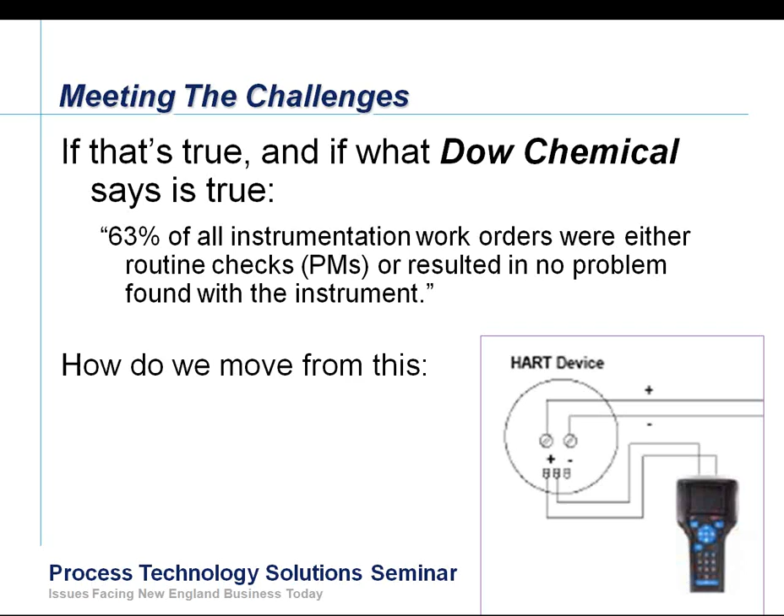But think about the time delay built into today's process. The operator sees a problem, generates a work order, and the work order goes into the queue. By the time the technician gets around to executing it—unless, of course, it's an emergency breakdown—there's still a time delay.

So what we want to do is move from that old model to this model, where somebody can click on an icon—one mouse click—and see this.

And what this is, is an attempt by Emerson to reduce increasingly complex technology—even 4-20 milliamp with HART devices—and this is actually a Fieldbus device, which gets even more interesting if you're doing Foundation Fieldbus, perceived to be very, very difficult, but it isn't.

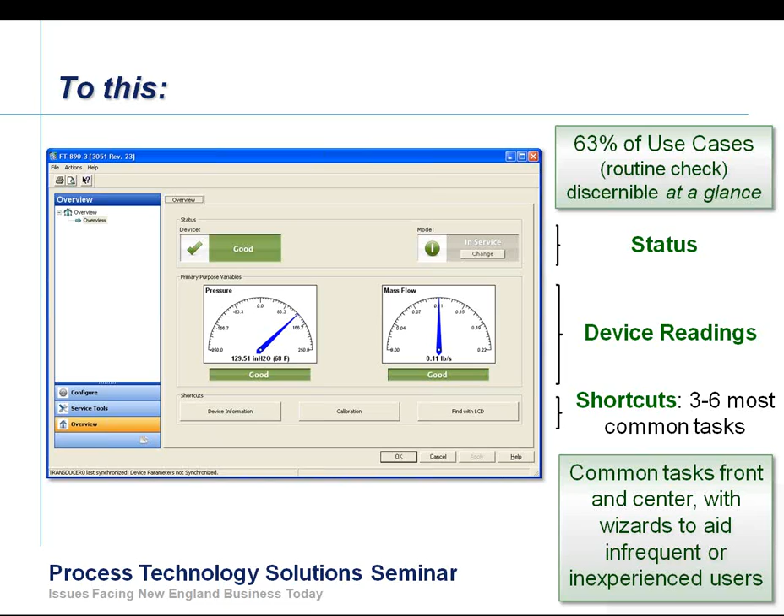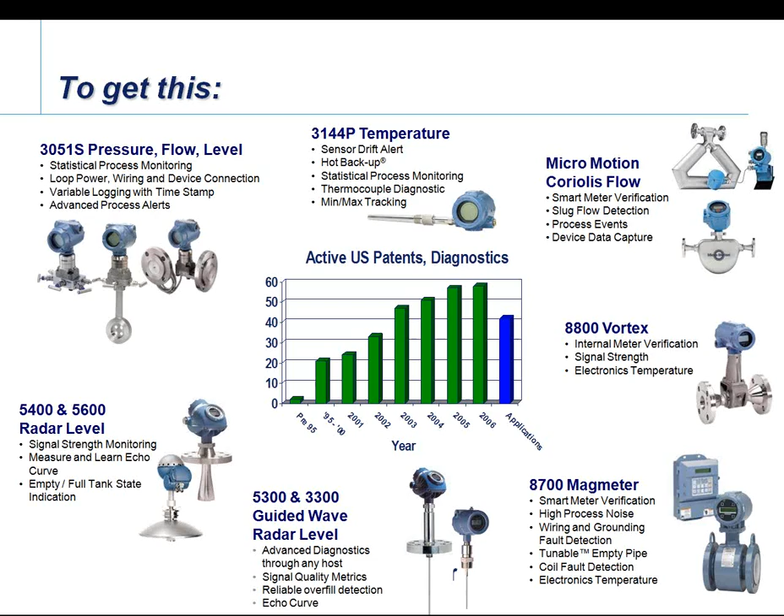That happened to be a pressure instrument. Can we do this only on pressure instruments? No, of course not. We can do this on virtually every field device that Emerson makes. This is actually not proprietary technology to Emerson. It's just that Emerson has taken more advantage of taking the intelligence that comes from a smart instrument of any protocol and presenting it in a user-friendly manner, especially to someone who may have just started at your business last week. They can get the same benefit out of working with our instruments that an old hand can get because of that interface, and it applies to all instruments.

Here is the basic philosophy. You can see my cursor circling the field device, and since the very beginning of intelligent instrumentation, and that would begin with Honeywell DE, DE standing for digitally enhanced, Honeywell was the first instrumentation automation vendor to actually put a microprocessor into a field instrument so you could query the instrument for its health. You used a handheld tool. So the model we showed with the brand new 475 field communicator a couple slides ago is not new technology, it's just that the tool is new. And in this particular case, the method is new as well. Back then, what we were checking for was the health of the field device, and today we're checking for the health of the field device.

That's the root of the model. What we are trying to say is that field devices have gotten so smart, and the advance of microprocessor technology has proceeded so far since the early 1980s when DE came out, that now the device is capable of monitoring not only its own health, but also the loop power, what the host is seeing, the connection, and actually some intelligence about the process. So what we want then, here is the fully developed model, is not just device health, but everything that instrument touches, from the process all the way back to the host, and we want to make it easy to use. That's where your payoff comes in.

So if we look at process intelligence and connection, what we're really trying to do is look for things that are happening in the process at that point. Is that process connection connected to the process, and is the line connecting it plugged? Are things in the process going awry? Do I have an unstable flame in a fired heater and I'm still continuing to feed fuel into it? What could be the ramifications of that? Can I operate a distillation column more efficiently by operating it closer to the point of flooding, which is the most efficient place to operate it? Process leakage - it could be the process connections themselves, or leakage themselves.

So once again, without going too much further into this, I want to be able to see more and more. The instruments have that ability, and everyone out there who has ever installed an instrument, from the very beginning of the process thinking about, gee, it would be better for the business if we had a measurement at this point, to the point where you actually flip the switch and you have the measurement, you know exactly what that costs - it will be higher, say, in life sciences, or maybe in a refinery application. It might not be so high in a facility that is not large in size and scale. But no matter what, the cost of installing a point becomes more easily justified and better amortized if you get more information out of that point.

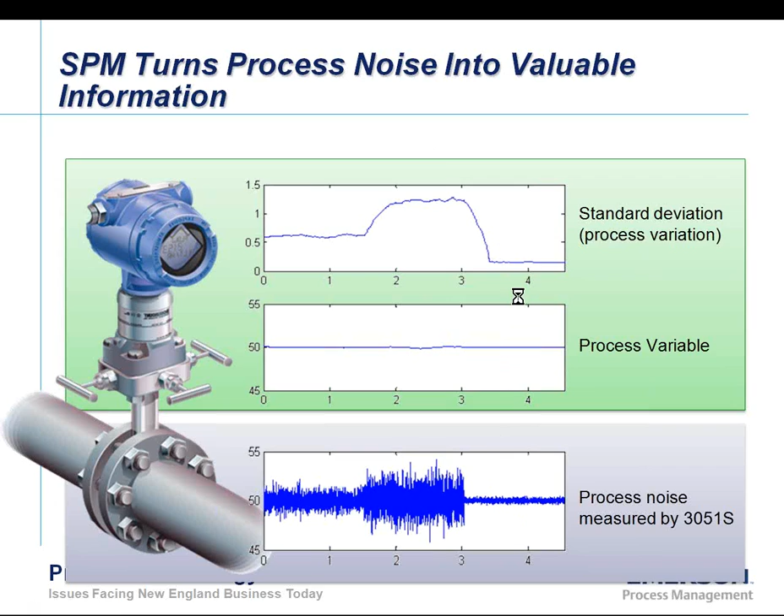There's a little time delay there. It's slower to report than the instrument is. However, it can be reported, but the fact that the instrument can measure it and report it is the key.

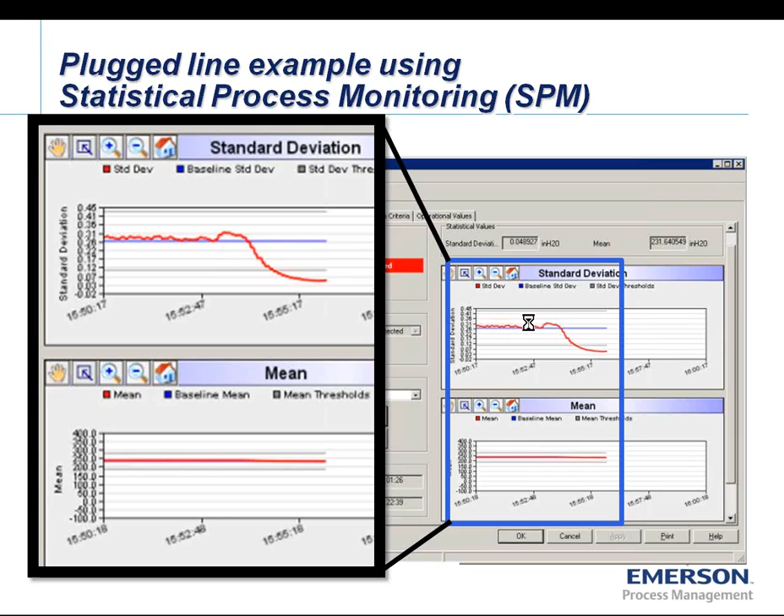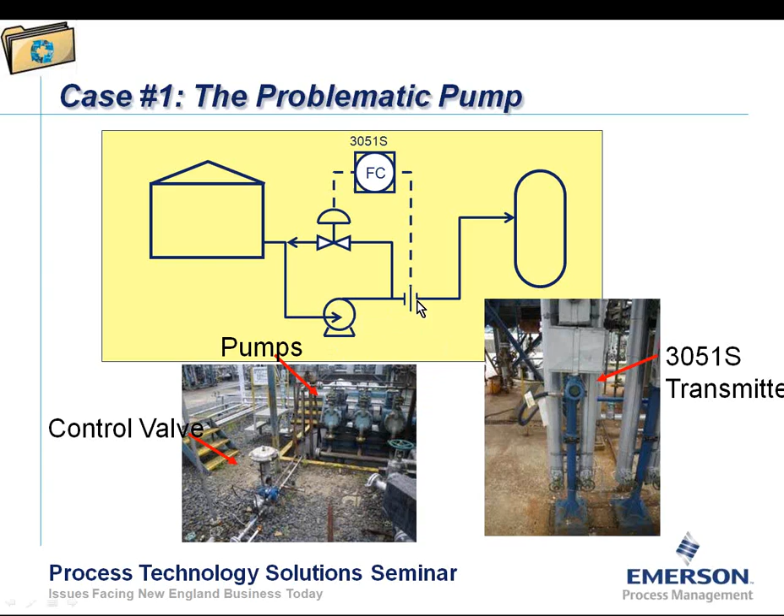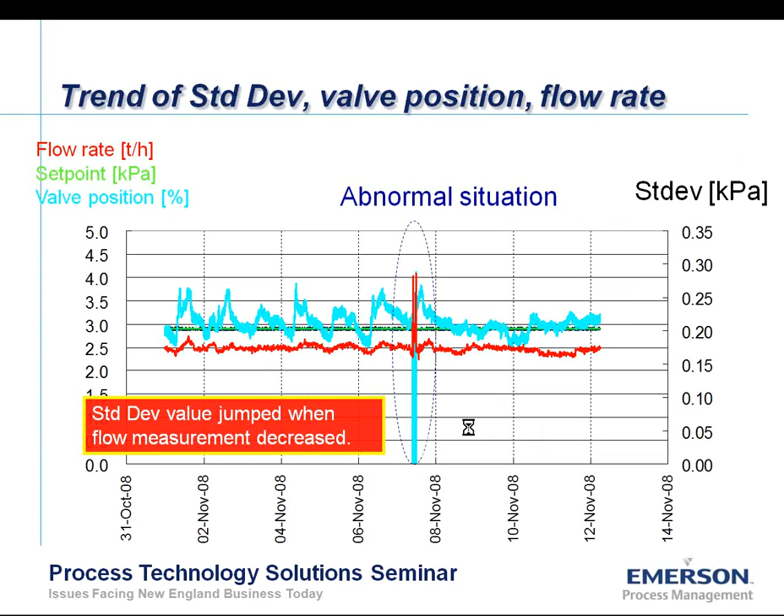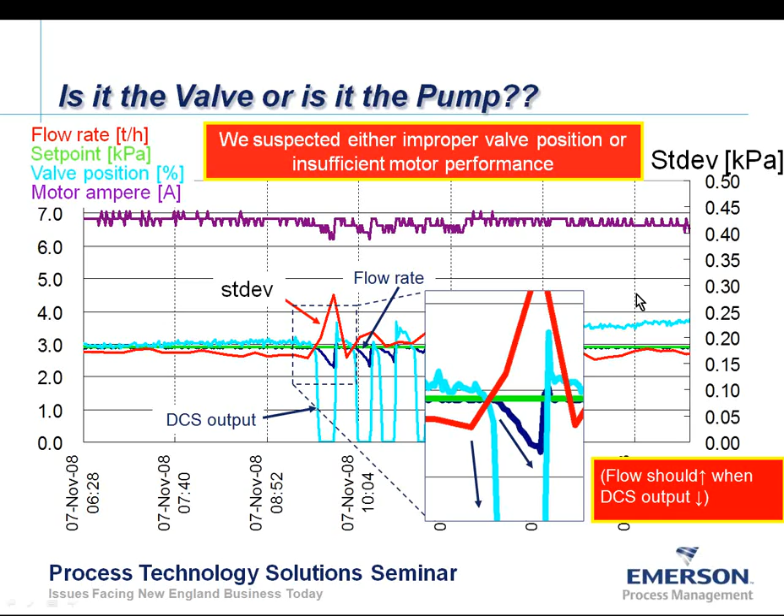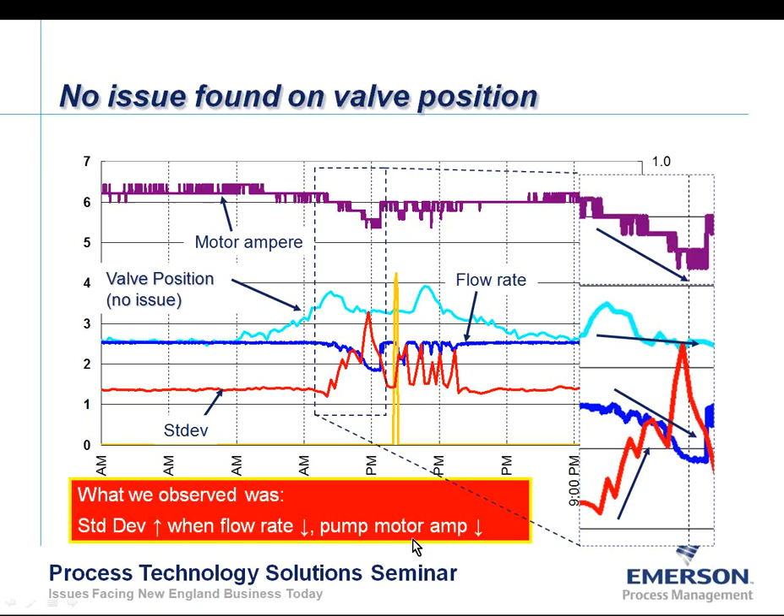So this was the presenter going through the steps of what we're monitoring and what we think it is. We think maybe it could be a valve—everybody suspects the instrument or the valve first. We are getting an indication that is opposite to what we expect, so what could be causing this? So my standard deviation jumps when the flow rate drops and the pump motor amps drop. This is awfully strange. Wait a minute—

If the pump has got air entrained in it, is it possibly damping the measurement, damping the response? In this case, they were able to back-figure the root cause, because the instrument could give them enough clues: if we get air in the lines, our measurements are off. The entrained air acts like a damper itself, and that's making the standard deviation jump. It's not quite like a plugged line, but it is similar, because it's damping the pressure signal. And the instrument was able to spot it in this case.

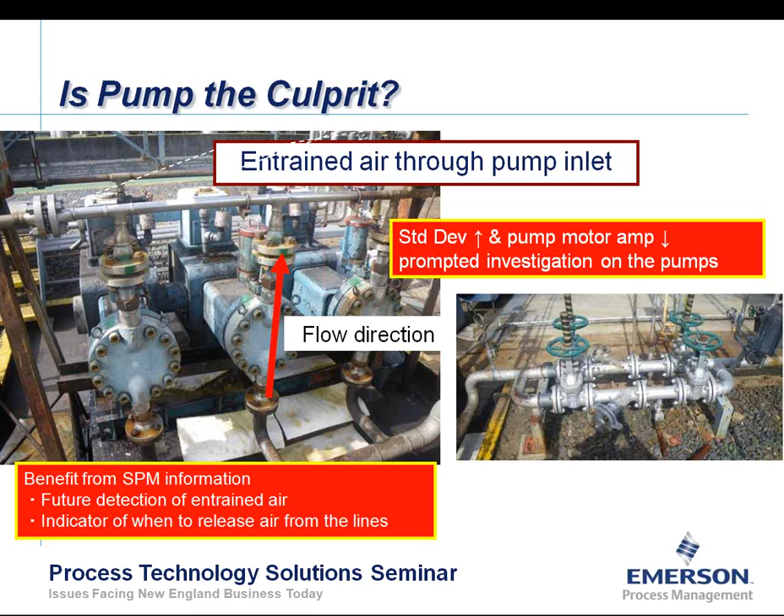So what else can statistical process monitoring do? We can detect air entrainment in the liquid flow line, or agitation issues—the agitator either stops or drops a blade.

Plugged lines, distillation column, furnace flame instability - we talked about that a little bit. Maybe a steam trap failure, maybe a valve cavitating. Any process that has a steady state condition that can be trended, the fastest trend is kept in the instrument, and now the instrument is capable of reporting it.

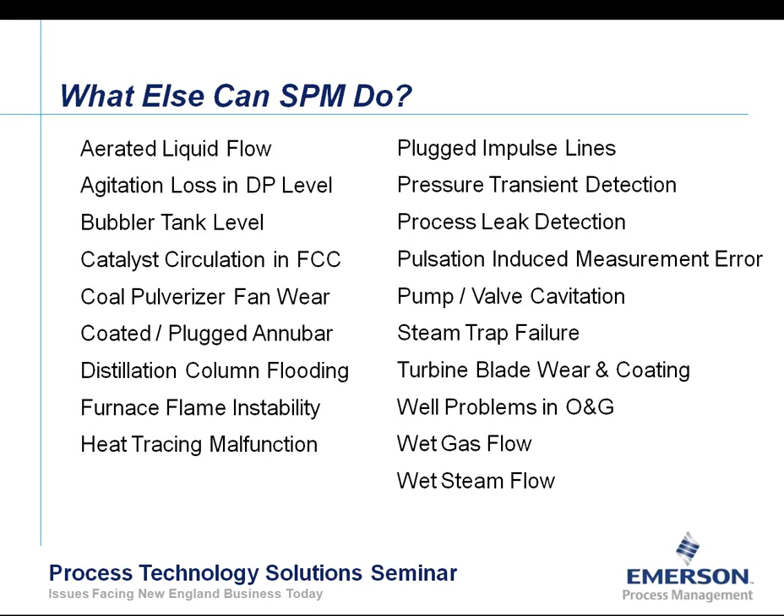So how do we make use of this? We have a four-step model that we talk about for turning what the instrument can now see into information that you can use. The first thing is to recognize what the instrument is capable of measuring and interpreting.

Standard deviation of the process variable, the mean of the process variable, and a brand new one, coefficient of variation, which is the ratio of standard deviation to mean. Coefficient of variation is useful in a flowing line where the flow is expected to change. Where you expect the flow to change, you do not expect the coefficient of variation to change - that's what that variable is all about.

The second thing is, knowing the instruments can do this, what do we have in our process where an up-to-the-second process touch can add value to our business? Do we have things that can be measured? So now what we do is we decide on how to implement, and then we set some alerts.

And then we go in and interpret those alerts. Remember those gray lines on the graph I showed you a little bit before? Where do we set those limits? If we set them too tight, we're going to plague the operators with excess alarms. If we set them too loose, we may miss something.

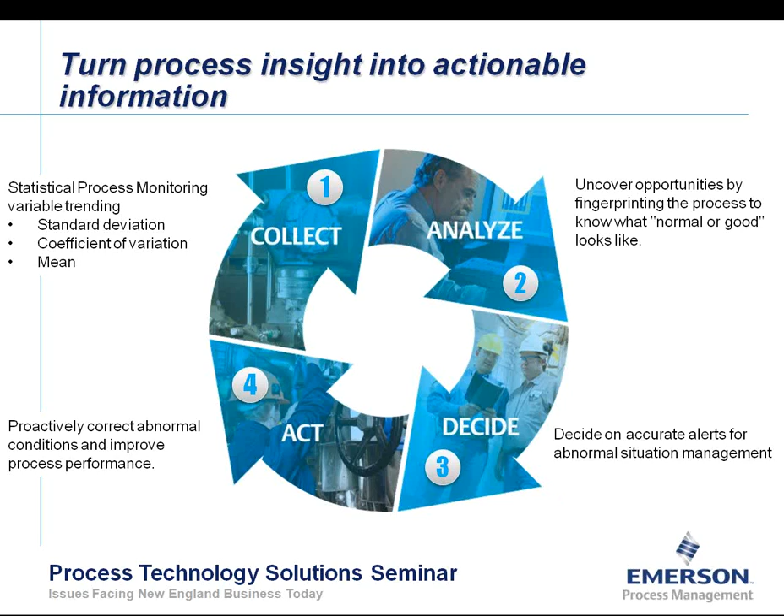So this four-step iterative process allows us to fine-tune the use of the diagnostic by the application, and to learn more and more about how our process works at a finer and finer level of granularity. And once again, it is not just the process connection, it's not just the instrument, it's not just the process connections, the primary elements - it's also what's going on in the process itself.

The instrument is capable of maintaining data within itself, so that actions that have been taken or that it has detected are logged in the instrument and can be accessed either from a handheld put on locally right at the instrument, or all the way back to the host with just mouse clicks, capturing the instrumentation's onboard intelligence. It's capable of trending more than one variable.

In this particular case, this is a pressure instrument that also has a temperature associated with it. All smart instruments, by the way, have an onboard temperature sensor - that's part of what makes them smart, part of how they do their correction routine. What we do is expose that as a variable, so now you have a second variable, and you can monitor it as well.

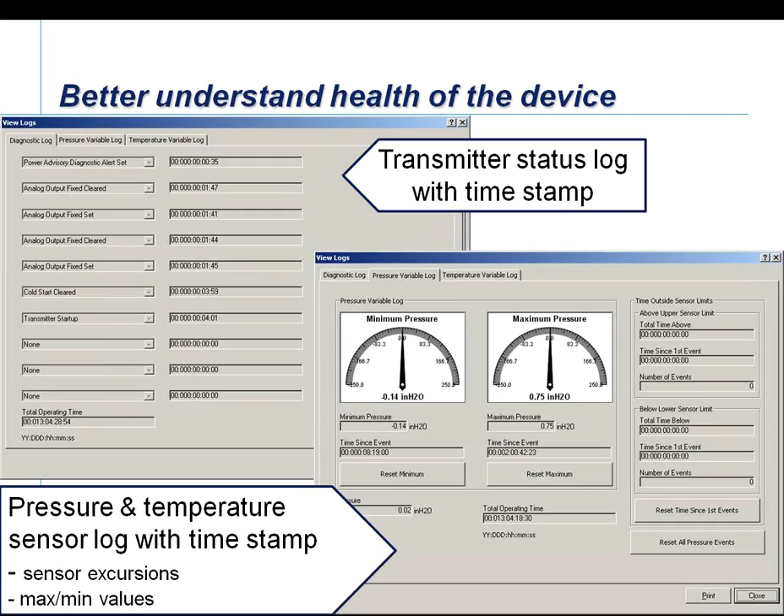So is the tracing on when it shouldn't be? Did the tracing go off when it should be? When did it go off? What might have caused that to happen? We log the event. We can also log some useful information in the instrument itself. Field bus instruments actually have the ability to log the last calibration event in them - they just have that much processing power.

So now here we are. We have taken care of this, we've addressed this end of the loop. Now let's take a look at this end of the loop, from the instrument back to the host, and that's loop integrity.

If you've ever had the experience - this is the one that everybody knows about - water in the terminal compartment. I have to tell you, folks, in all of the various types of process that you can imagine across the United States, in all the various places I have visited, I have never yet found an instance where they didn't have this happen once. Somebody opens the terminal cover and water comes out. Either bad connections, unsealed conduit entries, or condensate in the conduit running back into the terminals. When that happens, a not good thing happens - the loop is perturbed.

One of the things that is a universal truth about 4 to 20 milliamp instrumentation is that the measurement is almost always going to be there, but you may or may not be getting a good measurement because of effects, things that happen in the loop.

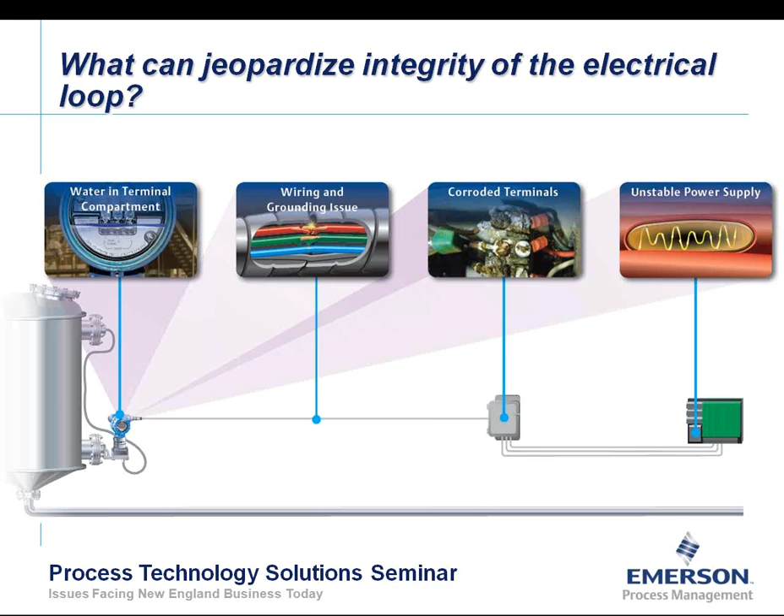HART 7, which is a discussion for another day, is retrofitting a way to detect that. But instruments built in the last 5 years that are not HART 7 have this built in, or can have this built in, or it can be added. This is a discussion to have with your instrumentation account manager.

Now it's constantly doing this, and at some point it gets an excursion from one of those causes on the prior slide, and at that point it reports a problem. The problem can be an alert, which resets when the alert clears. It can be an alert which latches and stays there until it makes you go look, or it can actually drive an alarm output. I can drive a failure output.

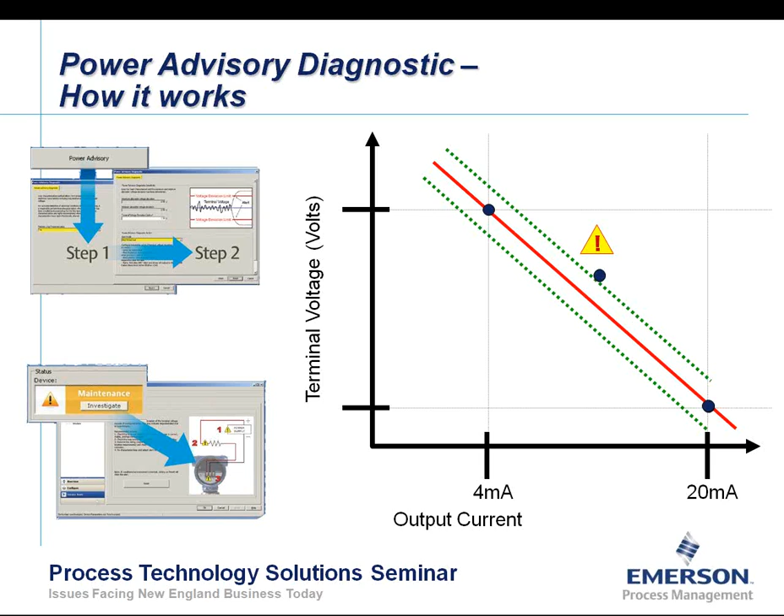I can put the instrument at 3.8 milliamps, so you know to go look right now because the instrument is in alert, but you can go in and see that that alert has been triggered.

There is actually an implication for this alert if you have a safety instrumented system. If you don't have a safety instrumented system, you can stare out the window for the next 20 seconds.

But if you do have a safety instrumented system, that loop diagnostic has been proven by Exida to actually have a positive impact on proof testing, where proof testing interval can be extended from 5 to 10 years because that diagnostic is installed, and it's a very large instance of taking the word undetected out of undetected failures.

It's a failure that is now detectable. That's why that safety level can be increased. That's the implication of this slide.

Once again, I'm assuming most people do not have SIS in New England, so I'm going to not spend too much time on this. If you want, we can actually get this presentation into your hands.

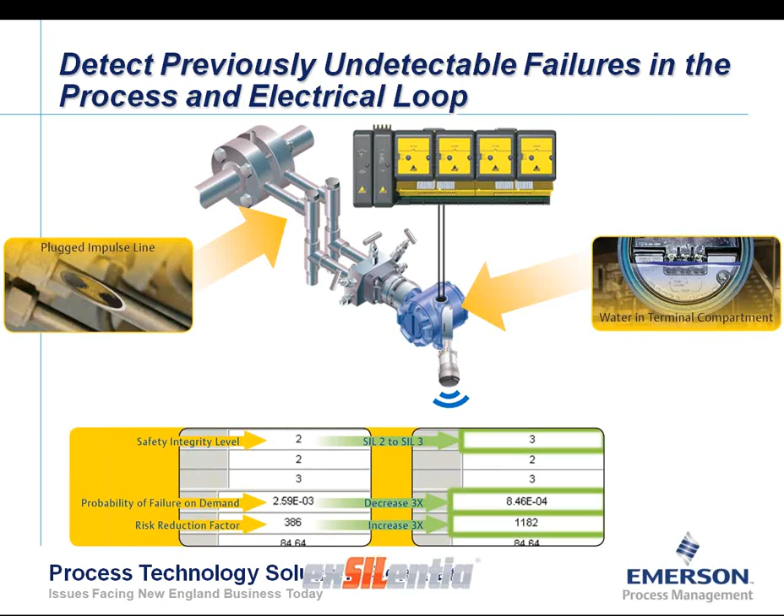So we are now covering from one end to the other, the complete loop, but now we want to make it easy to use. So here's that part. How do we get it? That's always a big question, and we're showing device screens.

From Emerson's AMS, Asset Management Software, which has all of this built in. There are other asset management packages available that are either EDDL based, which AMS is, and I'm not going to go into what the acronyms mean, or there's a newer one called FDT-DTM.

It uses an FDT frame. You might recognize Field Care, or what is Honeywell called? There's PDM, FDM, Field Device Manager. The various different manufacturers—Rockwell has the Factory Talk Asset Center. That is a DTM base.

Doesn't make any difference. No matter what software you choose to do interpretation, this works exactly the same. It looks exactly the same.

If you don't have an online asset manager and aren't intending to implement one, we can use a HART signal splitter. We can put the device into talk mode—the actual technical term is burst mode. So the instrument is now bursting second, third, and fourth variables, one of which can be an alert for one of these diagnostics.

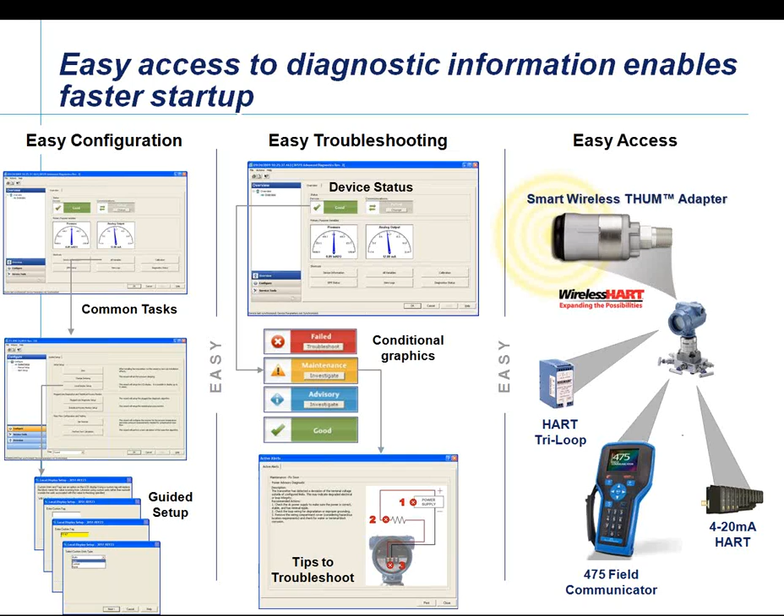So you apply a HART wireless adapter. We use the four-letter acronym THUM, but the generic term is wireless HART adapter. You apply it onto a standard HART-speaking instrument, and it will go on any HART-speaking instrument made by any manufacturer since the beginning of HART, which is the late 80s. It will convert it into a wireless instrument and allow the gateway to receive the information, report it, latch it, and hold it. It's a very elegant and very low-cost way to get this.

So that's another path. So now what we've done, in summary, is we have looked at the entire loop. So here is your maximum amount of intelligence out of that field instrument, and we're showing you how we have made it easy to use. Once again, all of this has been based on a pressure instrument because Rosemount and pressure go perfect together.

But all of our various different devices have some form of a trendable diagnostic that can be reported, so things like signal trigger level, signal level being generated by the coils. In a level instrument, do I have a probe that's coking to the point where...

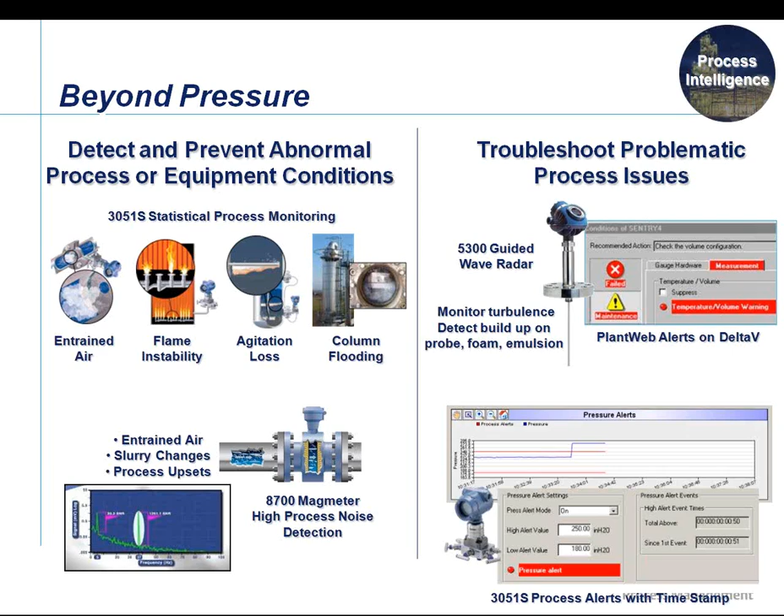...my signal level is being attenuated, and I'm going to have to pull it out and clean it. The device is going to tell you, and you can probably trend and say, next week we can make it to the next outage. The instrument is telling you we can probably make it to the next outage. So now you can plan your work, and it applies to any smart instrument.

Some of the devices have coking detection with forks - very interesting, detecting the degradation of a thermocouple, detecting that RTDs are going out of whack. One of them has failed, and now I'm on my spare, and I don't have a backup. All of these diagnostics are available, and they work the same way that I've outlined for the body of this presentation.

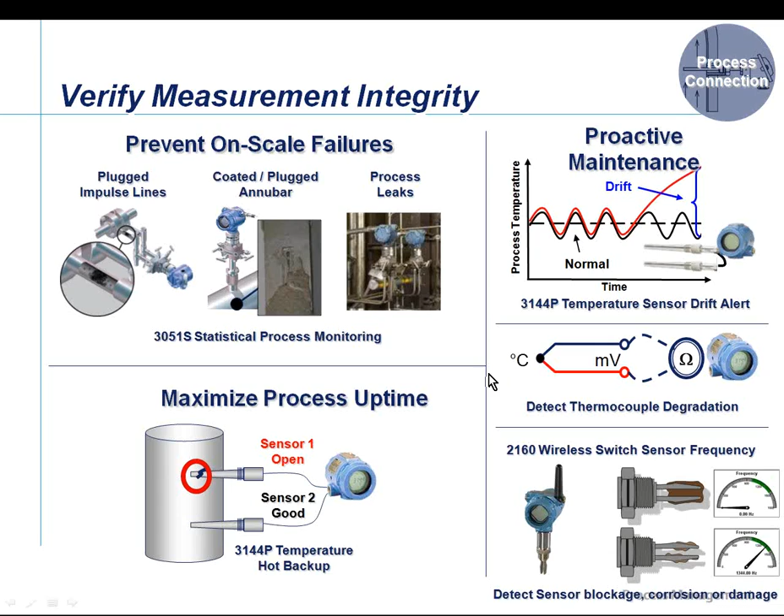How do you get it all? Since they're virtually all quaternary - the 2nd, 3rd, and 4th variable - I can use a signal splitter, the tri-loop that I can put a THUM on it, or I can expose the interface.

And this is something that not a lot of people realize, but if you're using a wireless gateway, or you're using a digital interface because you have bus instrumentation, be it Profibus or Foundation Fieldbus, and we make both, looking in the host interface itself will expose the variable information. You don't actually need software.

The system is the software. The hardware is the software. The field devices are the software. They have it all on board.